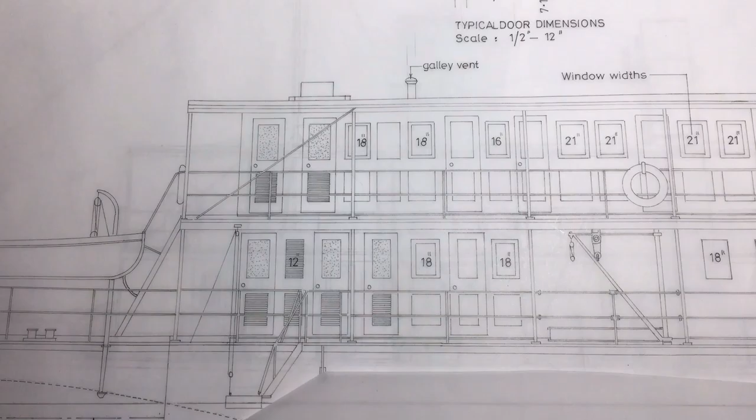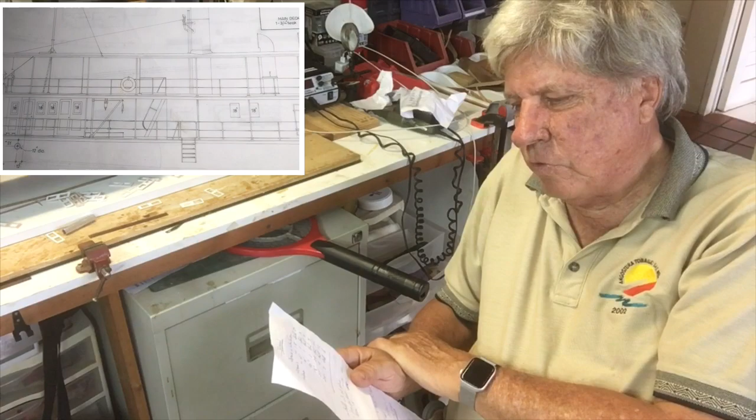Today we're going to start the process of making the doors and windows for the Naparima. And there's quite a few doors and windows. We have 17 cabin doors, 3 engine room doors, and with the windows it's much more complicated. We have 3 12-inch, 3 15-inch, 3 16-inch, 35 18-inch, 12 21-inch, and 6 24-inch windows.

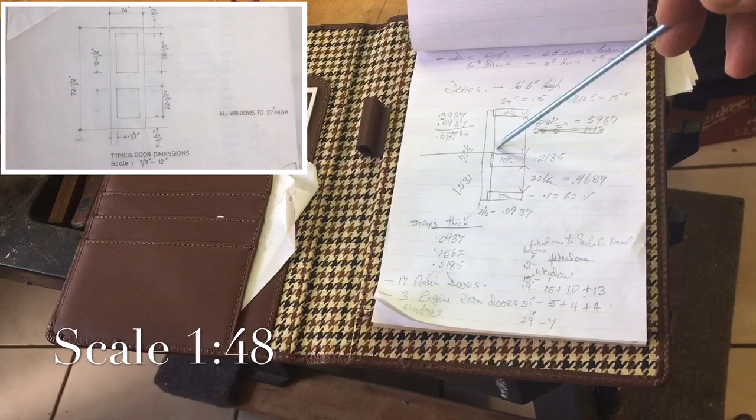So there's no question we need to make up a jig to be able to mass produce these and to make sure they all look exactly the same. The first thing we do is to work out the actual door itself. It's 73.5 inches. Probably was a 72-inch door, but anyway, 73.5 inches is what John wrote. And it's 24 inches across.

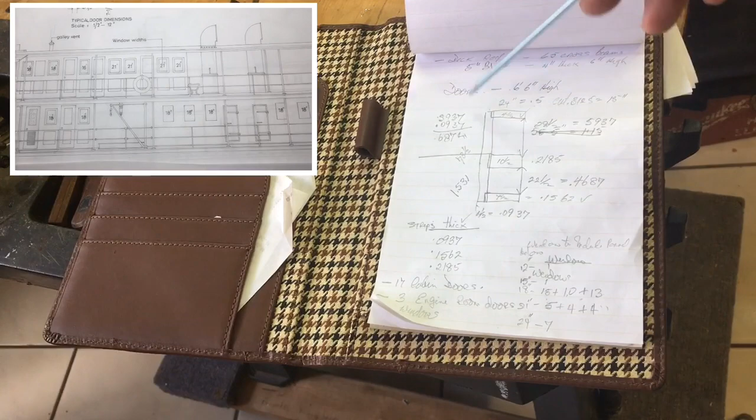So we need to cut out frames, and these pieces in the center are called rails. This is referred to as a rail, but some people might actually refer to it as a mullion. In the case of the top rail, it's 4.5 inches. The bottom rail is 7.5 inches, and the center rail is 10.5 inches.

And then we have different spacings. In the case of the bottom part of the door, it's 22.5 inches, and the top part of the door is 28.5 inches. And so we have to cut out all the various pieces that will make up this door. And so to do that, what we're going to do is cut out pieces and stick them, because we're going to make a bit of a jig. And this is basically how we will do it. Sorry. This is how we will do it.

Make sure they're absolutely square. Stick a number of these together and then put them through the Byrnes saw and cut them out. This will be a finished door with the rails in place, and then we can fill in the centers depending on the particular look that the model calls for. In this case, these are actually the windows, because we've made up the doors already. These are just some of the doors.

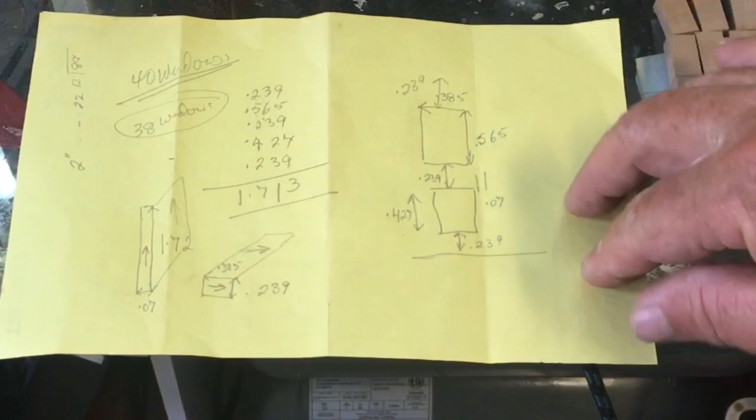And here are all the components that have been set out to make up the 24-inch windows. These are the frames, all cut to size, and these would be the rails, and the centerpiece would be the mullion. Here I have the details of the windows, and in my case, each of the rails are exactly the same for this particular window.

The most important part, you'll see how I'm lining these up here, is to get the grain right, so that when we go to slice these on the table, in this case the grain is running this way and this way, so that you get the strongest possible frame. And that's really the challenge.

If this was done like that, which is the grain working up and down, for instance, the odds of this piece breaking is fairly high. Just for those who might be confused, this is the end grain, and this is the direction of the grain on the wood. This is what we're looking for.

We mix up small batches of 5-minute epoxy and carefully hold the pieces in place, trying to make sure that they don't slip or move at all, and then clamp them to make sure that we get a nice good join. Now we leave that to dry.

I'm using 5-minute epoxy, which makes it real tight, but I want to finish the doors. Maybe I should have used a longer 30-minute epoxy, but that means each time I stick one piece, I have to wait 30 minutes before I stick the next piece. Now we can start taking them apart.

And the most important thing we need to do now is to clean up the insides. It's just so much easier to clean it now than when the pieces are done. To make sure that the centerpiece is spaced correctly, I've made up a spacer and I place that inside the door and then push the center rail in place, and that means that every single one is going to be again in exactly the same place. So when you're looking for consistency, this is very important.